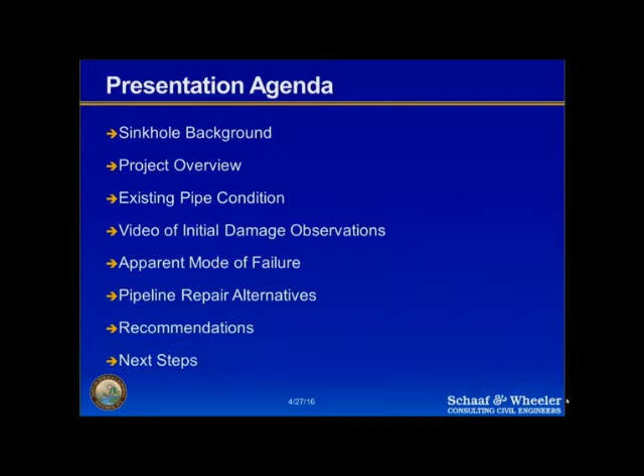I'd like to begin with the agenda. I will speak on the sinkhole background, briefly, the project overview, then pass it to Glenn to talk about the existing pipe conditions. He'll show a video of the initial damage observed in the pipe and talk about the apparent mode of failure. Then Dan will go through the various repair alternatives we considered, leading to the recommendation to replace the pipeline because it is the least risky of all alternatives, with more details to follow. I'll end with the next steps and answer any questions you may have.

The staff report has a detailed account of the history of this sinkhole. On March 13, the sinkhole occurred at the corner of Rheem and Center. The sidewalk and surrounding ground collapsed. Underneath, measuring 15 by 20 feet by 15 feet deep, is a 96-inch corrugated metal pipe that channels Laguna Creek, flowing from north to south. In the figure, the red dot identifies the location of the sinkhole. Ten years ago, another sinkhole developed in 2006, depicted with the blue dot.

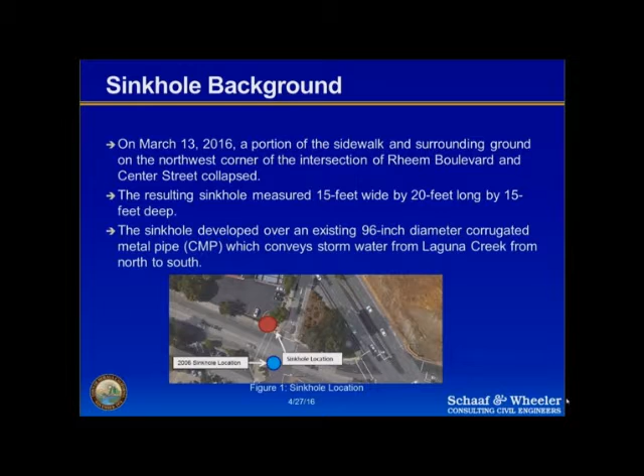This is a bigger overview of the project site. The green circle shows where those two sinkholes occurred. I mention this because later in the presentation you'll want to know where these landmarks are, as it'll help us when we walk through the culvert identifying the different damages. The blue arrows show how the creek flows, and the line is the pipe system. Those in yellow are concrete, while those in red are corrugated metal pipe. As you can tell, that line runs underneath the Rheem Shopping Center.

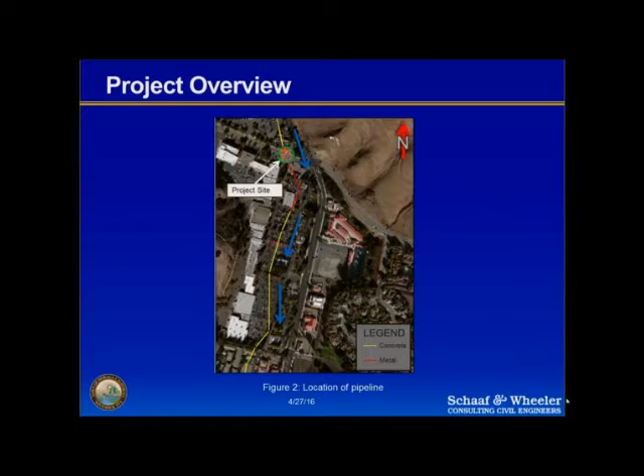Now I'm going to pass it on to Glenn to talk about the existing pipe conditions.

Thank you, Edric. As mentioned, my name is Glenn Anderson with Schaaf and Wheeler. When the hole was deemed safe for us to enter on March 25th, myself and a consulting geologist made our way into the pipe to inspect what happened and what was going on. I'll walk you through what we observed when we got in there.

The first thing you see is extensive corrosion of the bottom of the pipe, or the invert, as it's called. In certain places it was very Swiss cheesed, as shown in the bottom picture. In other places it was completely rotted through, completely separating sections of the pipe. Where it was Swiss cheesed, we measured voids below the pipe of up to 15 inches deep, extending 2 feet to either side of the center of the pipe - a pretty big void below the pipe.

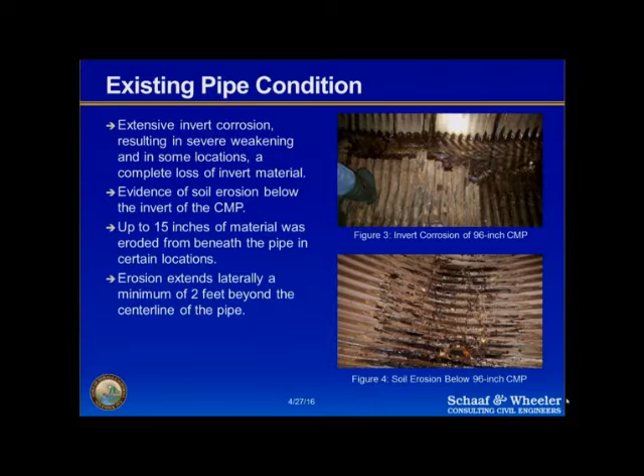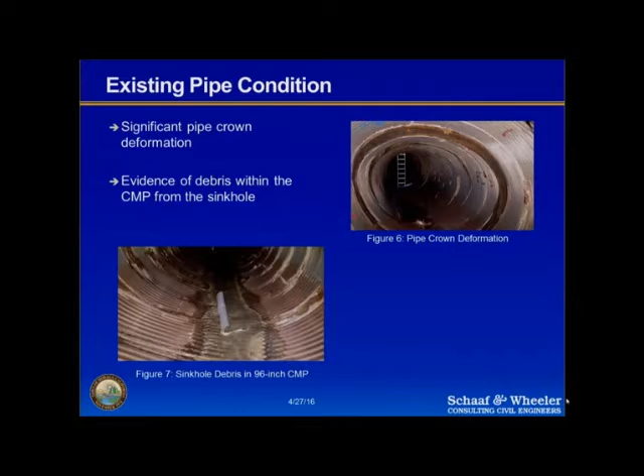In addition, we saw severe deformation of the top of the pipe, or the crown. That's very obvious in figure 6, shown here. You can see this pipe, when put in the ground, was a circular 96-inch diameter pipe, and here you can see the ovality of the pipe. Also in the pipe was evidence that the sinkhole had made its way in - debris, valve vault lids, and, as shown in the picture, electrical conduit from the sinkhole itself.

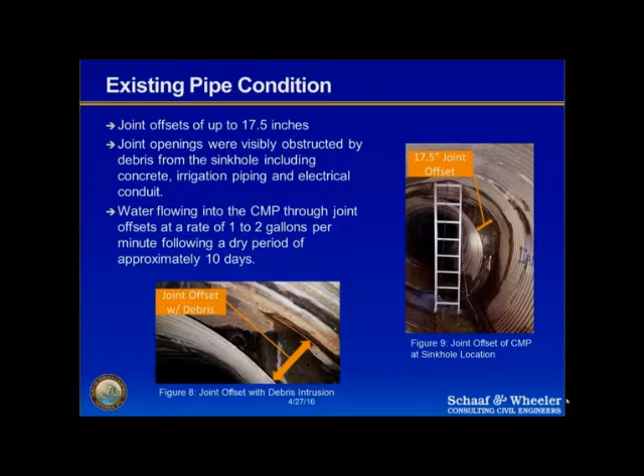What we see here is the epicenter of the sinkhole. The ladder represents where we accessed the pipe through a storm drain inlet above at the corner of Center and Rheem. On the right side of the ladder, there's a significant joint offset measuring 17.5 inches wide. At that offset, as shown zoomed in figure 8, there was concrete from the sinkhole, sidewalk sections, and irrigation pipe that had been sucked down towards this joint offset. Even though it had been dry for 10 days before we entered, there were still 1 to 2 gallons a minute of water flowing into the pipe - so water was still making its way in.

While we were in the pipe, we did as thorough an investigation of the pipe within the town's right-of-way as we could. We went from the north end on the Auto House property to the south end, the town's right-of-way. This table just highlights what we found throughout that.

A couple things to highlight. Remember, this was a 96-inch circular pipe when it was installed. You can see in two locations the height was reduced down to 78 inches high, so it went from 8 feet to 6.5 feet in height.

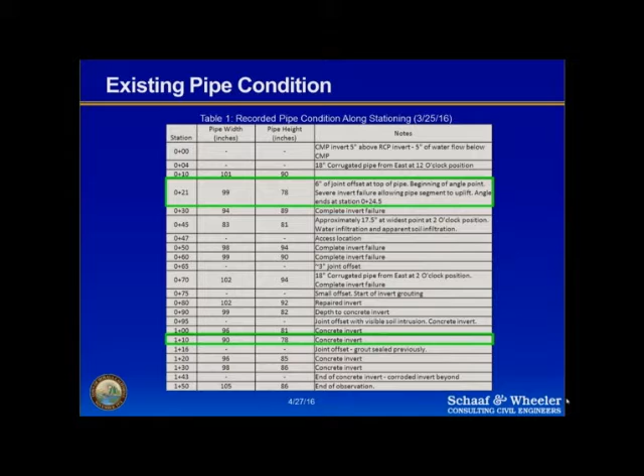45 feet to the north of that, on the Auto House property, is where this metal pipe transitions back to concrete pipe. At that location there was a vertical offset between the two pipes — the metal pipe was 5 inches higher than the concrete pipe — and that allowed water from the concrete pipe to flow below the metal pipe.

71 feet south of the sinkhole is a visible joint offset that was patched when the sinkhole of 2006 occurred. We believe this was where the sinkhole happened at that time, and temporary repairs were made to deal with it.

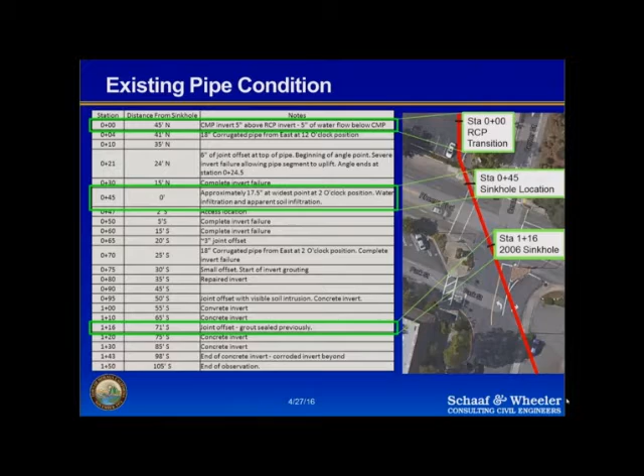With this bit of background, we've got a dark video from within the pipe. I'll narrate it for you. We started at the south end of the pipe where those temporary repairs were done in 2006. You can see the floor of the pipe was covered in concrete to deal with the corroded bottom.

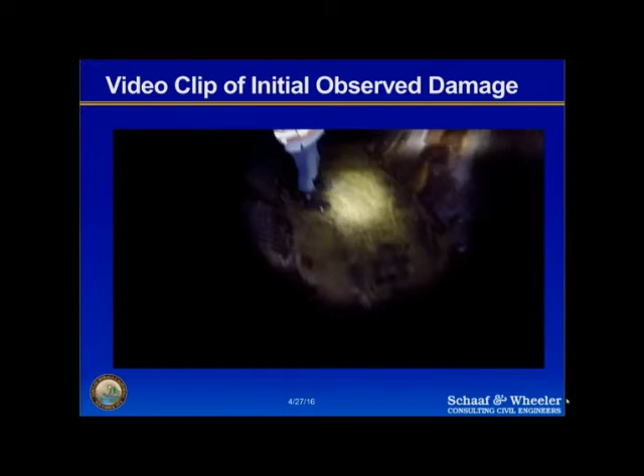You can see, although not discussed anywhere before, joint offsets. As we're heading north, up the pipe, this is the large joint offset noted 71 feet south of the current sinkhole — that's where the temporary repair for the previous sinkhole happened.

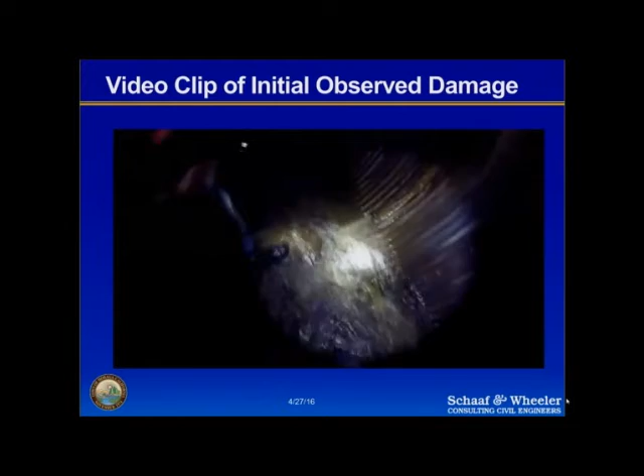As we continue north, you see more concrete patch on the floor, and again, the further north we head, we see more joint offsets within the pipe.

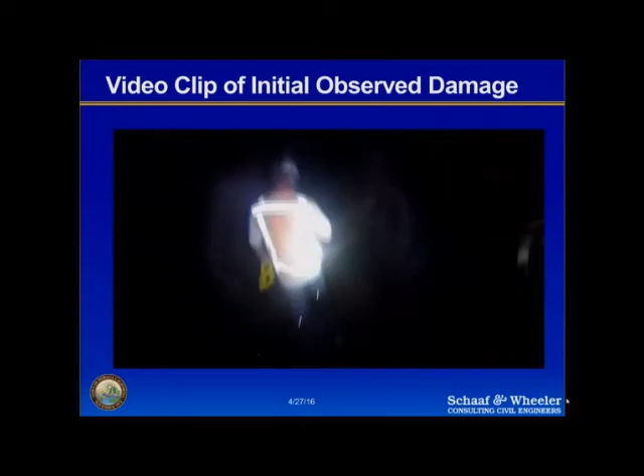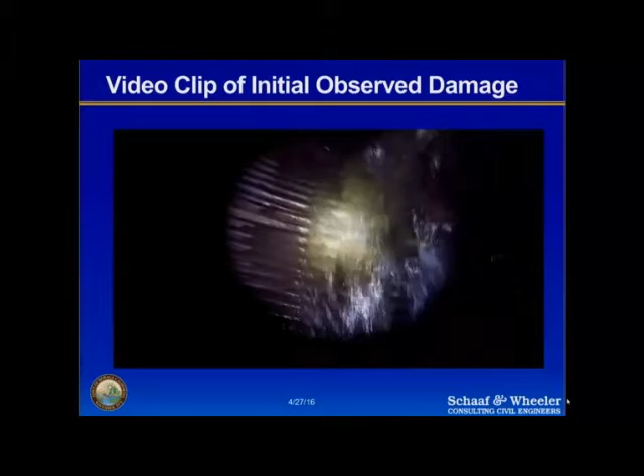Continuing further north, the concrete patch on the floor ends, and you can actually see the bottom of the pipe is gone — there is no bottom of the pipe. Kevin, the geologist, was standing in gravel that is not within the pipe. There is no bottom or invert of the pipe.

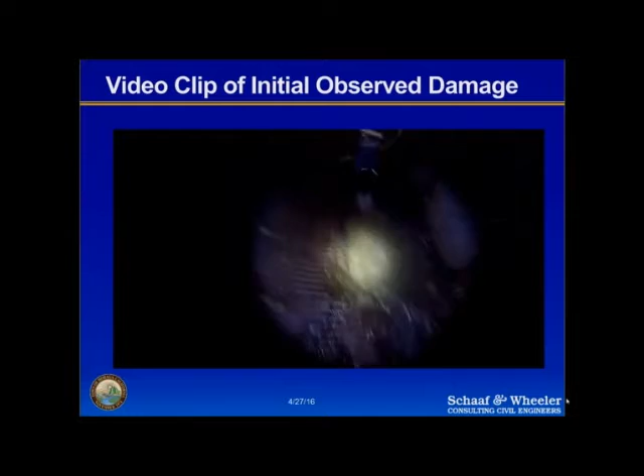You can see debris washed in, and here you'll see him reach down and actually pick up some of the gravel. That's a very good example of the pipe bottom being gone.

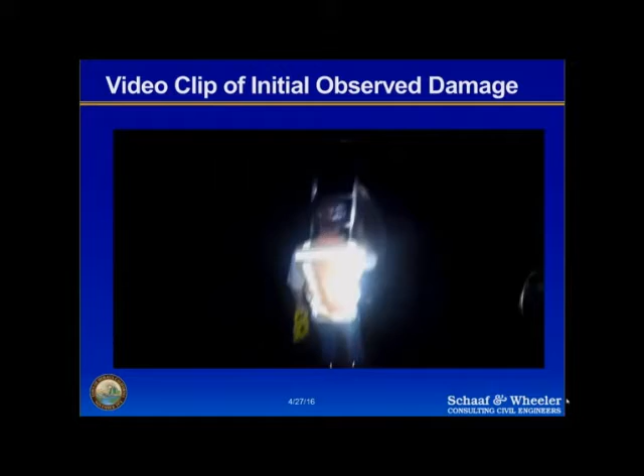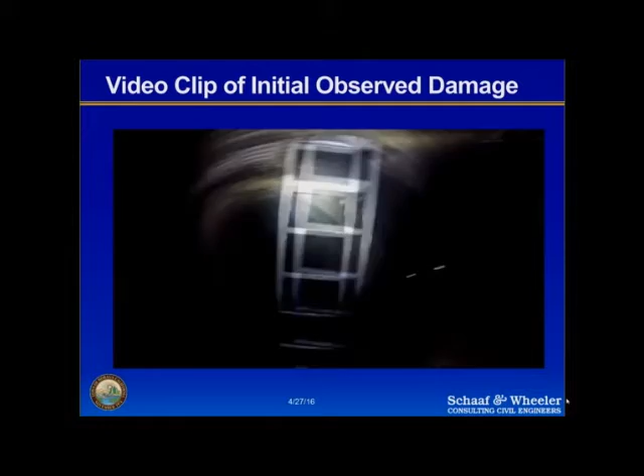Now there's the ladder that we use to gain access, and we'll come up, and you'll get a video of the joint offset where all of the debris and soil was able to make its way into the pipe. That's the access point above, which is a concrete structure sitting on top of the pipe with a drop inlet, or storm drain inlet, on it.

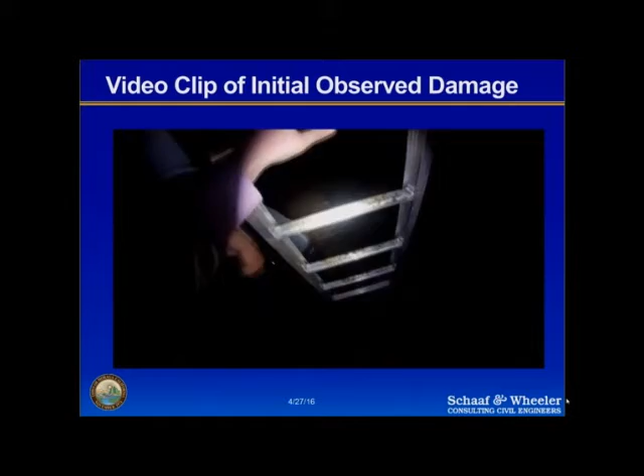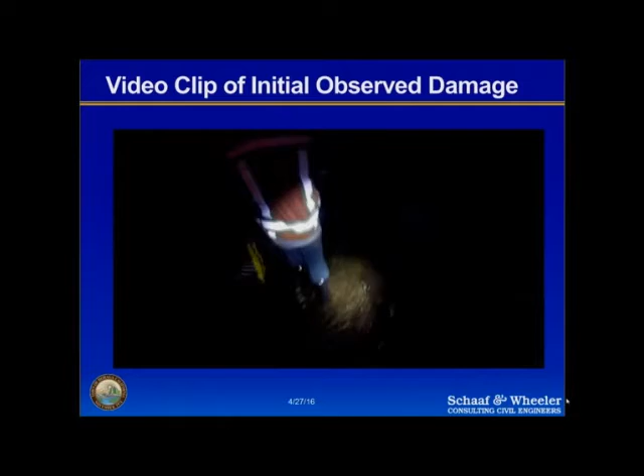As we continue north, we're still in the metal pipe, but you'll continue to see joint offsets and failing bottoms of the pipe, failing invert. Here you see a complete separation of the pipe on the bottom.

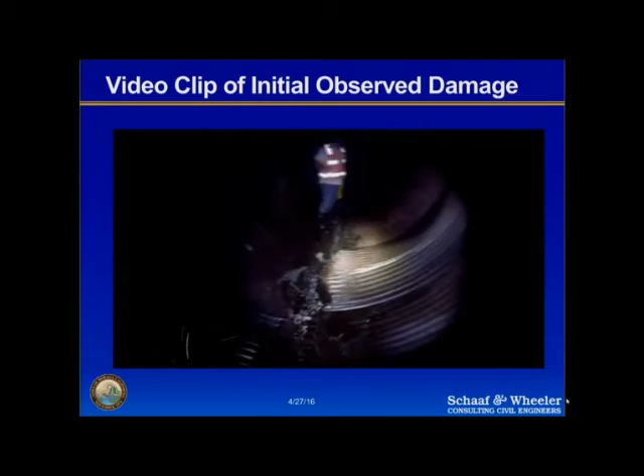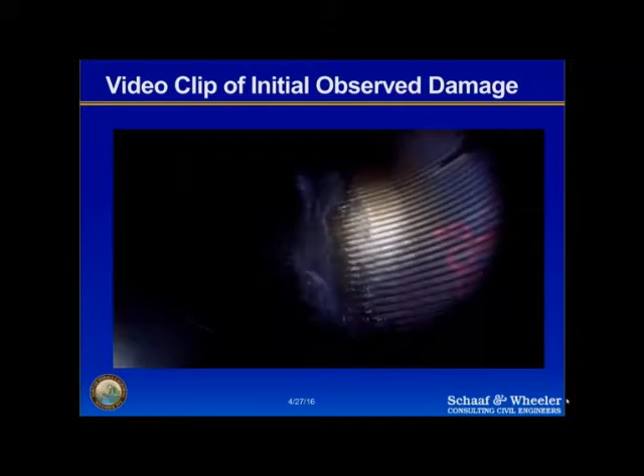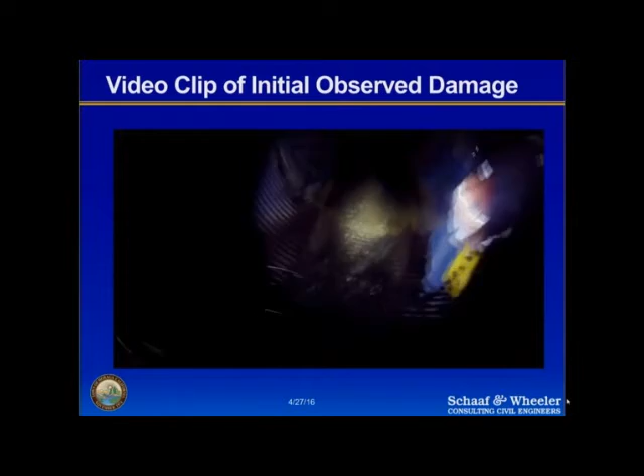We continue north, and it's more of the same until we get to the concrete interface. I said earlier we're heading north and going uphill — you'll see it here in a second. When Kevin actually steps into something that's supposed to be uphill, you'll notice he steps down about 5 inches into the pipe. So that's supposed to be a higher portion of the pipe, but it's lower.

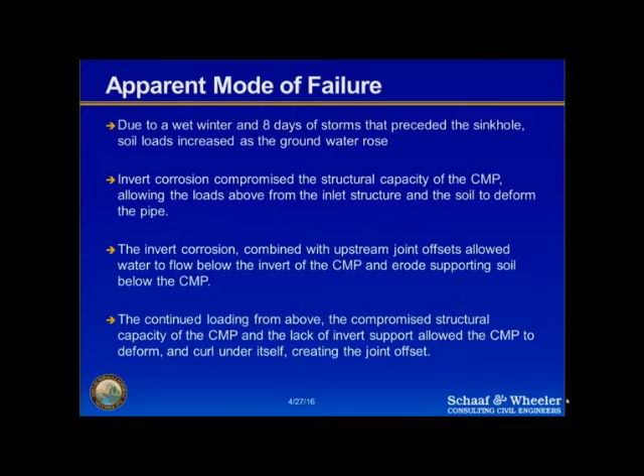So, seeing everything we've seen, what caused this? Basically, this sinkhole was preceded by 8 days of rain. Combine that with the corroded invert of the pipe, the corroded bottom, as well as loading on the pipe, and it allowed the pipe to deform. That deformation created this big opening that all of the water from the storms making its way to this site was able to wash the dirt and materials into.

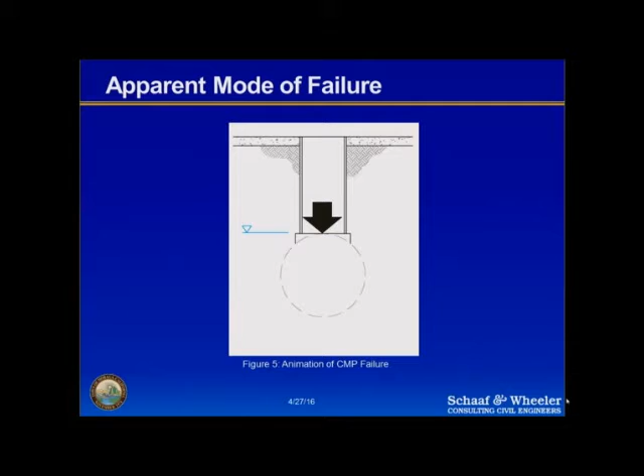This is a little convoluted, but hopefully this next animation shows it clearer. We've got the installed condition — a nice circular pipe with this inlet sitting on top of it and some water level. As time goes on, the bottom of the pipe corrodes and a void is created, and this grows and grows. The orange is the corroded pipe and the green is the void. As that happens and the pipe is loaded, it's allowed to deform around itself, somewhat folding in on itself.

It does that, and it creates this crescent shape here that you'll see is blue, and that's that joint offset that I was talking about. That's the 17.5 inches that lets soil come in.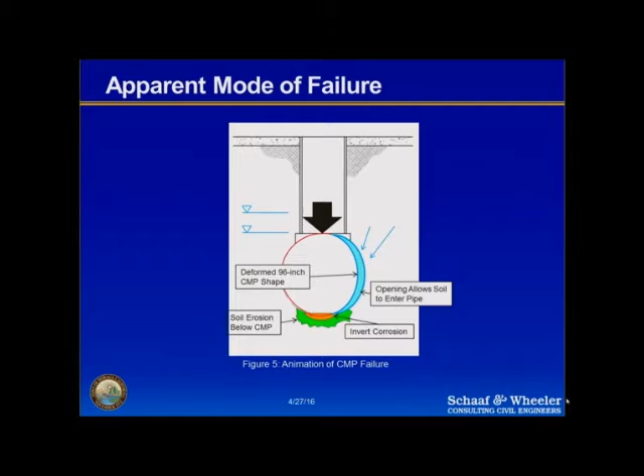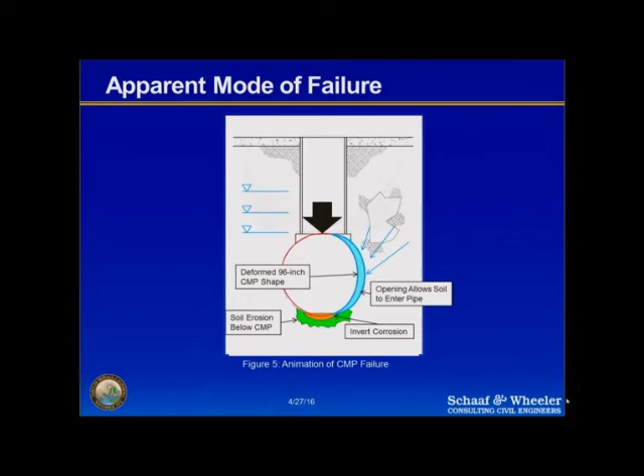Now, as that happens, and now we've got rain, we've got water making its way into the pipe, pulling soil with it, more and more soil. Eventually a void is created, and as more and more soil is pulled in, this void gets bigger and bigger, and eventually the soil above it and the sidewalk can't support itself anymore, and that's the collapse you get.

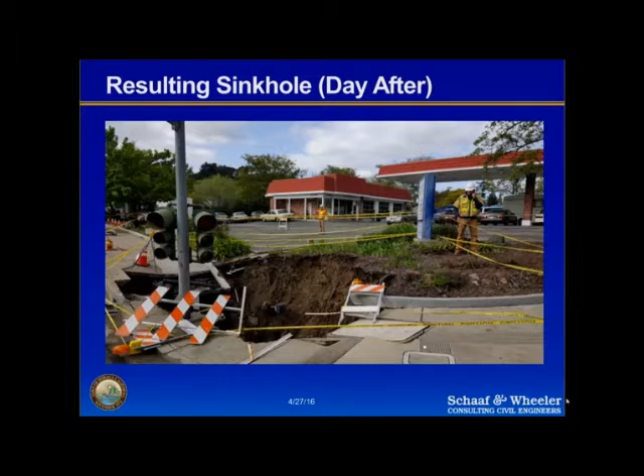That's what we have here. This is the day after, where this is the sinkhole with the traffic light still in it. You can see the sidewalk failure, and on the next slide, this is taken from the Lamorinda Weekly.

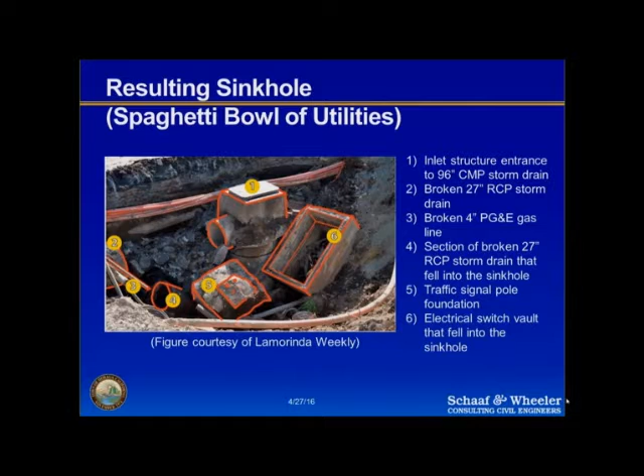Just talking about the spaghetti bowl of utilities that we have. You can see the cable fiber optic lines are those orange things behind the inlet structure. There's a PG&E switch, the foundation for the traffic light, other storm drain facilities, all in that hole.

And then fast forward to what we look like today. The site's been secured. There's temporary fence put around it. The I-beam is holding up those fiber optic cables so that everyone in the town of Moraga has internet and cable TV. Plastic's been placed to mitigate any impacts that rains may have in terms of expanding that sinkhole. So that's where we sit today.

I'll hand it off to Dan Schaaf now to talk about alternatives.

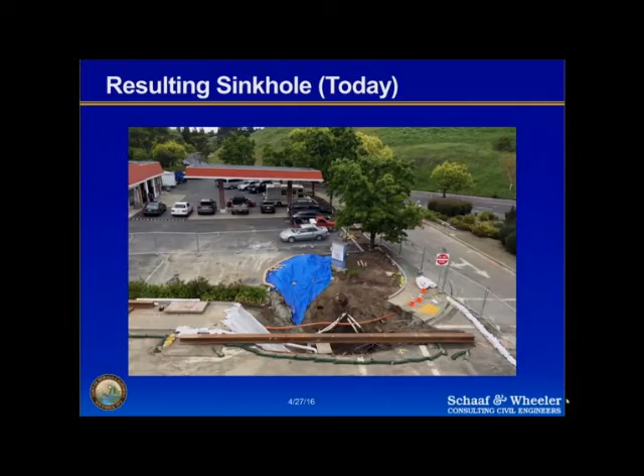Thanks, Glenn. Again, I'm Dan Schaaf. I'm an engineer with Schaaf & Wheeler. I'm also one of the owners. You may recognize me from the Storm Drain Master Plan that I presented last summer.

So tonight I want to talk about how we move from here, what alternatives we have and what we looked at. Just real quickly, we looked at 4 things. We looked at really sort of almost a do nothing - let's just secure the site and move on, see what happens.

The next is to kind of take advantage of some newer technology called Trenchless Technology. Instead of unburying, digging up the existing pipe, can we use newer technology to slip line a pipe into the existing hole, minimizing the traffic impacts.

Then the full, the other end of the spectrum is channel restoration. Let's bring back Laguna Creek for this 120-foot section, kind of daylight it, a little more natural. And then lastly, we'll talk about just replacing the 120-foot section of pipe with brand new reinforced concrete pipe.

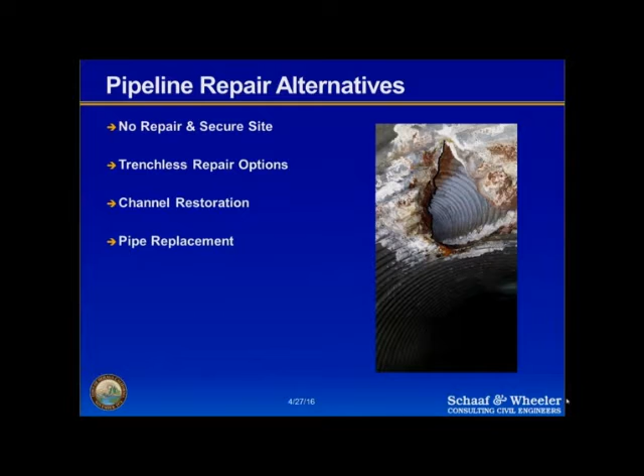So the first one, this is really the do-nothing repair. The idea here is just simply, let's build a fence around the existing sinkhole, have a celebration or whatever it is annually, and maybe the celebration will get bigger as that hole gets bigger, because that's exactly what will happen.

So about $500,000 just to secure things in place and see what happens. Obviously, we're not fans of this. There's incredibly high risk doing this. Not only will the sinkhole grow, but we believe the pipe is going to fail. That will block flows. We'll probably experience flooding upstream and in the area. So very unsafe, very unreliable, not recommended.

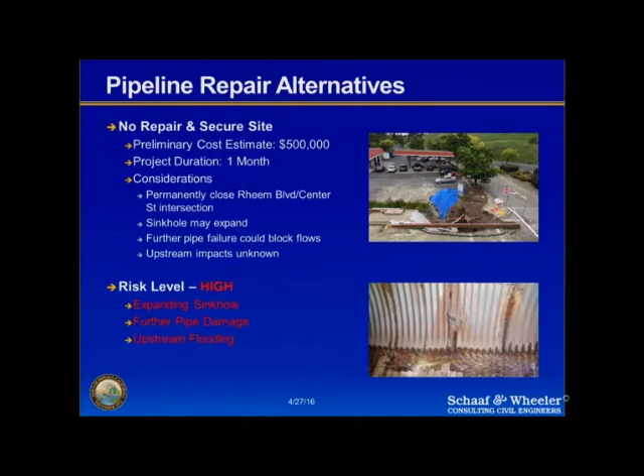And the advantage is not ripping up the road. A little bit cheaper to do. We estimate this about $2.5 million. However, that slip line pipe has to fit in with that opening, and Glenn mentioned that opening is only about 78 inches, so 6.5 feet.

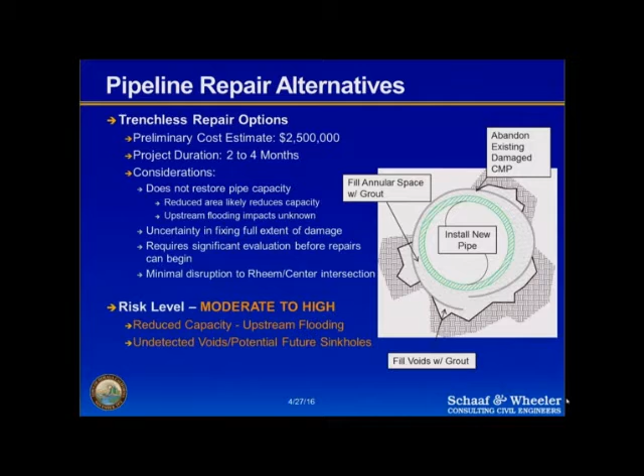So we're going from an 8-foot pipe to a 6.5-foot pipe. So we're losing 33% of our conveyance area, our flow area. Therefore, we don't think that pipe will have capacity to pass Laguna Creek downstream. So there's a high potential for future flooding if we get a large storm event.

The other thing to mention is that those voids that are out there in the soil also need to be filled. And there are methods to go through and measure that. They use acoustic hammers and things, but there's no guarantee that we will find all those voids and fill them. So there is still some potential for sinkholes in the future with this alternative.

We're talking about a 30-foot hole, and we have water coming out of a 96-inch pipe going very fast, so we can't use vegetation in that channel. You would see lots of rock to slow down the flow. It's basically a spillway type thing where water's coming very fast and you need to slow it down, and then immediately it's going to go back into another pipe.

So estimated at about $20 million. We don't know the extent of the realignment of the roads and who owns the easements. Lots of permitting, and very important here, this is not eligible for federal emergency funding. So very noble to try to daylight the creek, but not the right place for it.

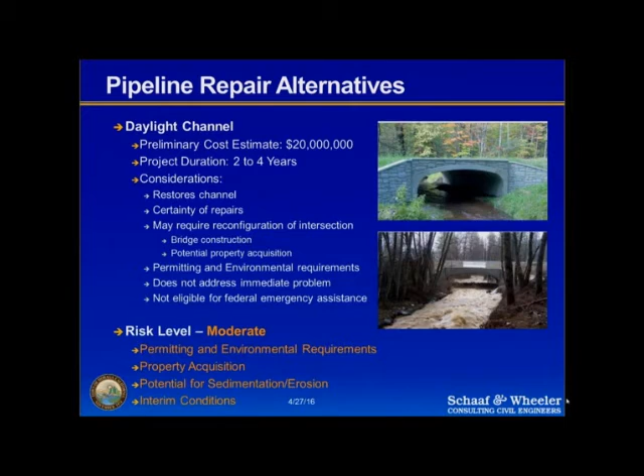And lastly is to simply remove the corrugated metal pipe within the public right-of-way and extend the 96-inch reinforced concrete pipe to the extent of the public right-of-way. We estimate this project at about $3.3 million. We believe it'll take about 6 months from now, including design and construction. But what's important to note here is this restores 100% of the capacity of the pipe, actually a little bit more than the corrugated metal pipe, because corrugated metal pipe is kind of rough and concrete is very smooth.

This has incredibly low risk of future sinkhole failure. If we were to design a new pipe from scratch in a new community, this is exactly what would go in the ground.

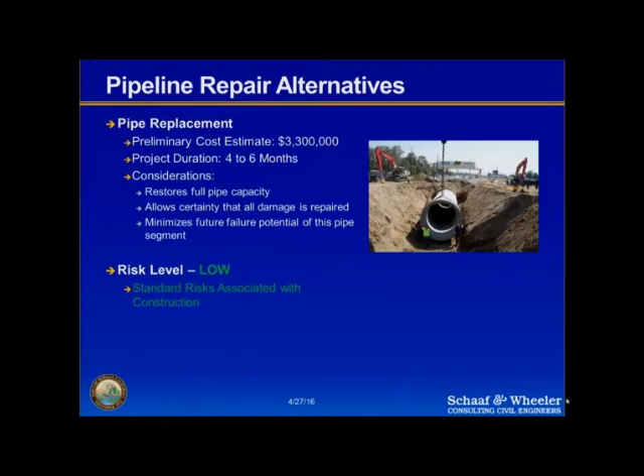So to wrap up quickly, those 4 things we talked about: doing nothing costs $500,000 and can almost guarantee you're gonna have problems in the future, so to that we say no. Then using some of the trenchless technologies, saving about $800,000, but reducing the conveyance in that system, increasing the risk of flooding, and there's still uncertainty about sinkholes. Not as great as the others, but there's still that risk. So for that, we're saying no.

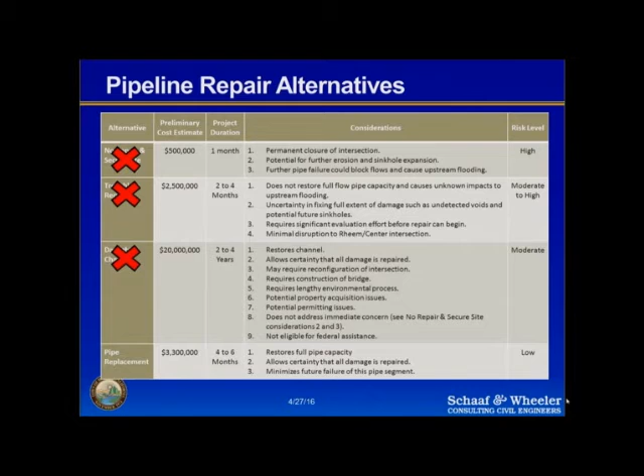And then daylighting the channel, again, not the right place for this. It's very noble to try to do this, but it needs to be done on a much larger scale to be economical. So to that we say no, which leaves us with replacing the pipe with reinforced concrete.

And the next slide goes into what we're recommending. Again, it restores 100% of the capacity of the original design for what Laguna Creek will pass. All the soil is removed, we put in a new pipe, we backfill it, so there will be no voids. It's concrete pipe, it's solid, it's non-corrosive. In a stormwater environment, this pipe could last easily 100 years. And also it's very strong, it can handle the loads.

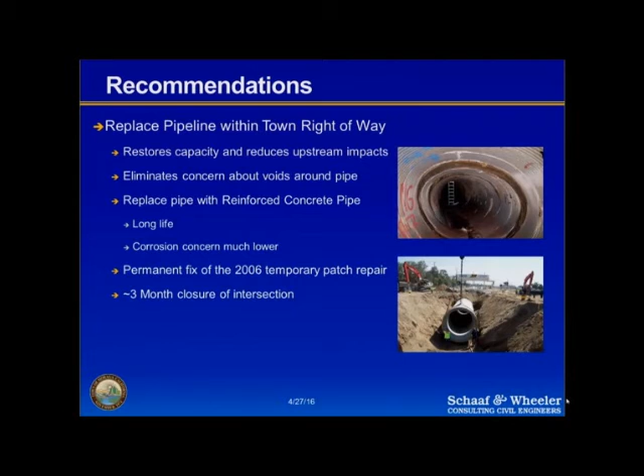So one thing I also wanted to point out is that we're not only fixing the current sinkhole, this extension of the pipe would cover the 2006 spot repair, the Band-Aid that you saw earlier. So the construction window, we're estimating about 3 months of disruption to trench that and put in a new pipe. And with that, I'll let Edric tell you where to go from here.

Thank you, Dan. So as you can see, a recommendation is to replace the pipe with reinforced concrete. A lot of very good benefits and the least amount of risk as described. If council does concur with this recommendation and directs staff to proceed with the emergency repair, we will hit the ground running right away.

We will begin our design of the repair project itself, prepare bid documents, begin right away looking out for potential contractors, seeing if they're capable and able, pre-qualifying them to see if they have the experience we need, and then bringing them along during the design process at various submittals so that they are aware of what they're getting into and can provide a very quick turnaround in providing us bids. All of this will be done within a month.

So quite a lot of work in a very short period of time, but this is necessary because we want to beat the winter season. Once that happens, we'll bring back to council on June 8th to award the construction contract. Also at that time, we hope to learn a lot more about the financial plan and what it means to be under the governor's proclamation.

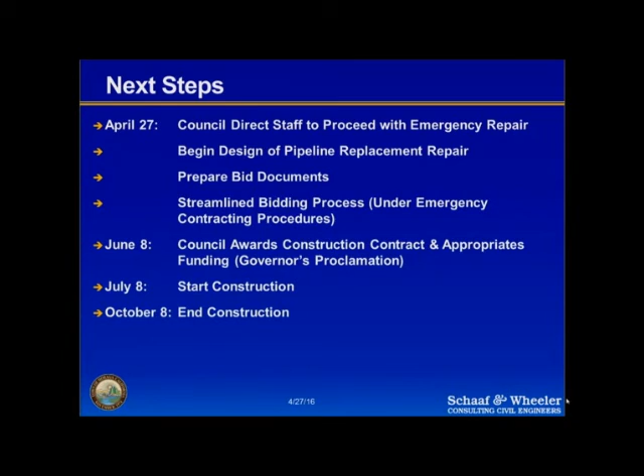We began conversations already. Just today, we got an email from Caltrans, and so the next step is to set up a meeting with them and understand what the process is and how much we may be able to get. At that point, once we understand the financial plan, we can also appropriate the funding that we need in order to do the repair.

It takes approximately a month for the contractor to get all their contracts together, their submittals, and to start looking at staging areas and things of that nature. Generally speaking, we'll be able to do a notice to proceed about a month after council awards. 3 months into that, October 8th is when we'll end construction, right before October 15th, the beginning of the rainy season.

So with that, that's the conclusion of the presentation. I want to first thank the community. They've been immensely patient—the businesses, the residents, the detours, and all of that. We've been very appreciative of that, as well as the town council for the guidance during this emergency. And lastly, Senator Glazer and Assemblywoman Baker, their support letter that was provided to the governor did help us significantly get that proclamation. So thank you to all of these parties.